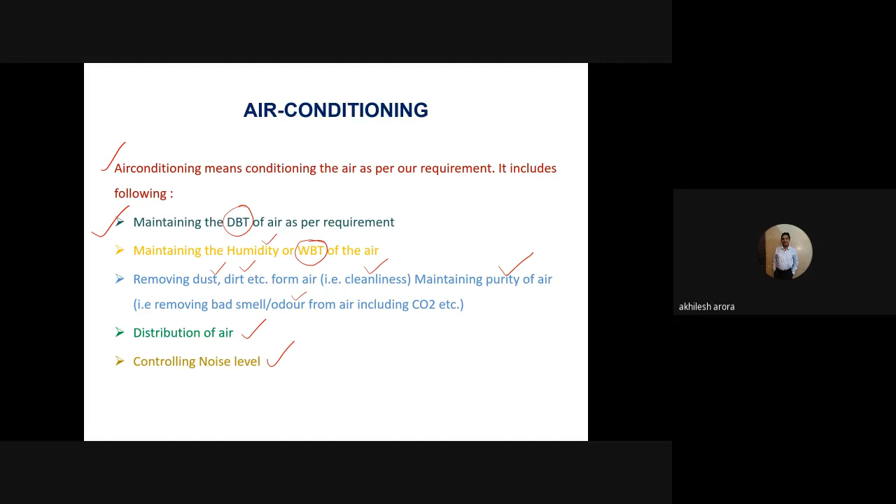Now let us proceed further. When we talk about air conditioning, it is the air which is important in this particular case because the working substance is air in air conditioning. Okay. Now, this air is not just air actually, it is the moist air, and moist air is a mixture of two gases. One of these is the dry air part, which itself is a mixture of a number of gases, and the other is the water vapor, which may exist in a saturated or superheated state.

Okay. Now, it means if I am talking about air, then this air is equal to dry air plus water vapor. And when we write air only, it means we are considering the moist air part actually. So moist air is equal to dry air plus water vapor.

And dry air basically comprises different gases, for example, O2, N2, CO2, and many other gases. But you know that O2 is somewhere around 21% and N2 is somewhere around 78%, whereas the other gases are in traces. Okay. And the remaining part is the water vapor, which I will be writing as small w.v. So this is the composition of the air, dry air part and the water vapor. And the dry air part is the major portion and the water vapor is very, very small.

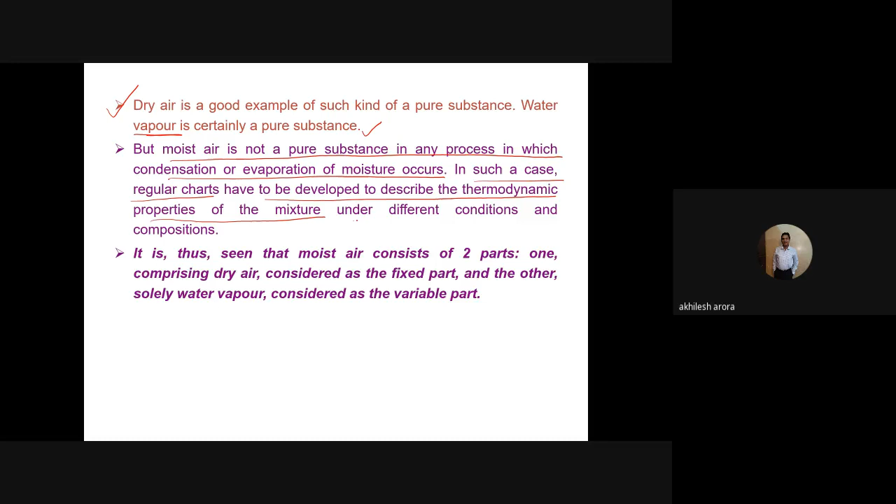Water vapor. Now let us see it here, water vapor. But the moist air is not a pure substance in any process in which condensation or evaporation of the moisture occurs. In such a case, regular charts have to be developed to describe thermodynamic properties of the mixture under different conditions and compositions. Okay, I hope this is clear to you, because when we are talking about the moist air, its composition is varying over the period of time when the condensation or evaporation is taking place. So for this particular case, we will have to develop the regular charts to describe the thermodynamic properties of the mixture.

If we are talking about the dry air part, I can use the equation because I can consider that this dry air is behaving as a perfect gas. Similarly, for the water vapor, I can also assume this as a perfect gas, and I can use the equation PV is equal to MRT for the water vapor. But when they are mixed together, then it's not an ideal gas or a perfect gas. And in that particular case, we have to develop regular charts to describe the thermodynamic properties of the mixture under different conditions and compositions, because the moisture content will vary.

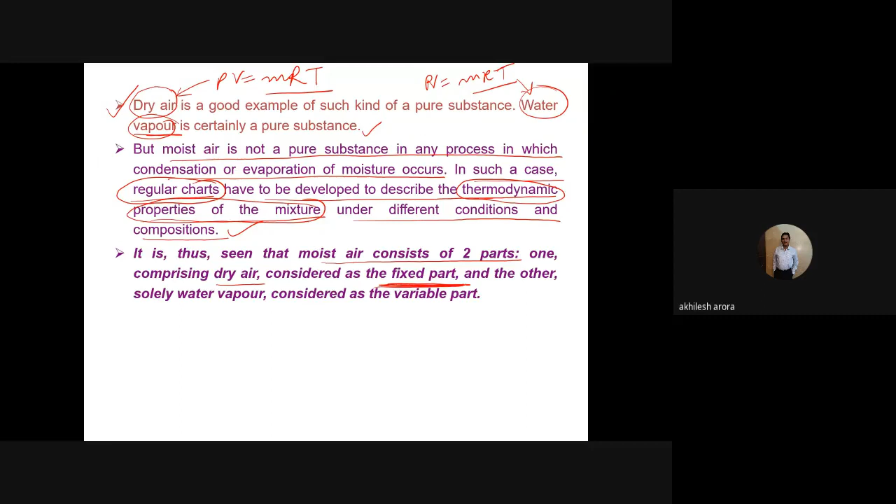It is thus seen that the moist air consists of two parts, one comprising of the dry air considered as the fixed part because it's not going to vary in mass, and the other is solely water vapor considered as a variable part. So I can also write it as M is equal to MA plus MV. MA stands for mass of dry air part, MV is mass of water vapor, and M stands for mass of air. When I say air, it is basically moist air. So I hope this is clear to you.

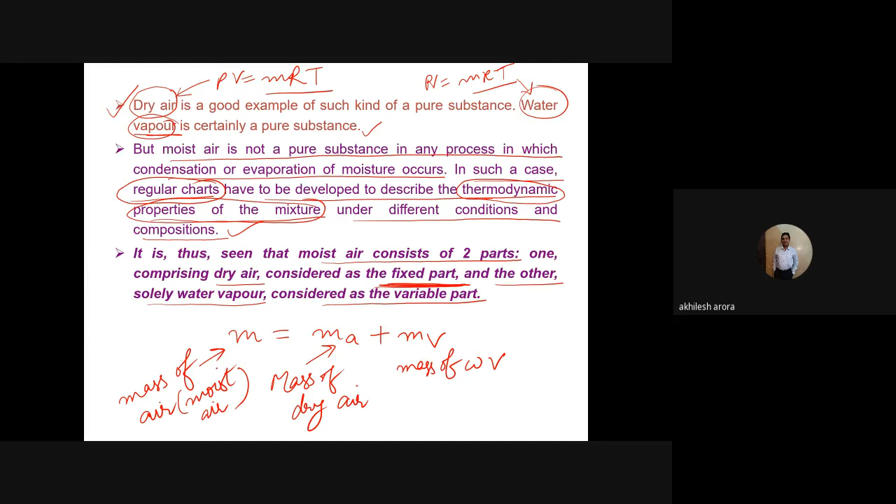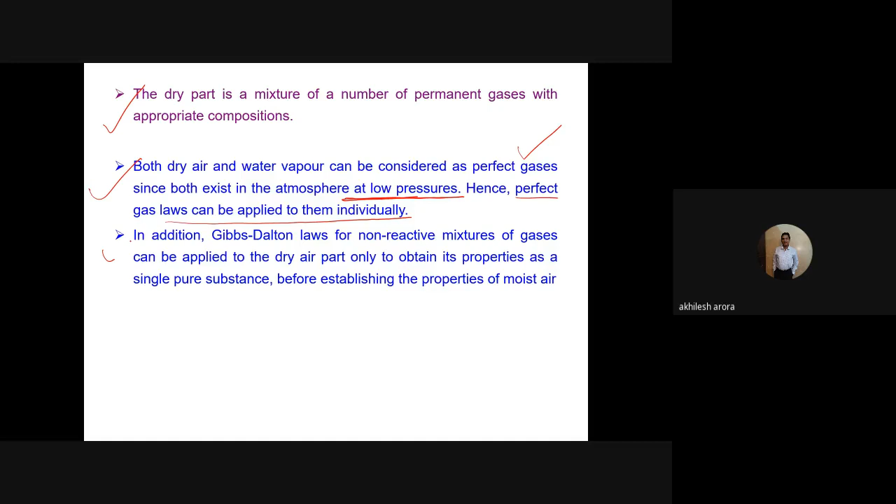The dry air is a mixture of a number of permanent gases with appropriate composition. This I have told you. Both dry air and water vapor can be considered as perfect gases, since both exist in atmosphere at low pressure. Hence perfect gas laws can be applied to them individually. In addition, we can apply Gibbs-Dalton laws for non-reactive mixtures of gases to the dry air part only to obtain its properties as a single pure substance before establishing the properties of the moist air. We will discuss this later on.

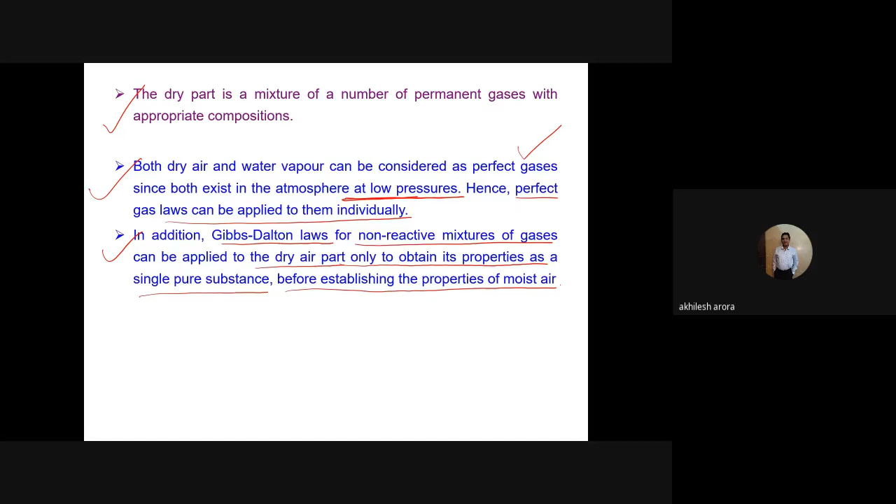So if there are N gases, we have to add the number of moles of all these gases, and to calculate the total mass, we add the masses of different gases M1, M2 and so on, and the total mass M will be equal to sigma Mi, where i stands for a particular gas. All these gases are existing at temperature T. The total pressure is P, and each component or each gas is occupying a volume V.

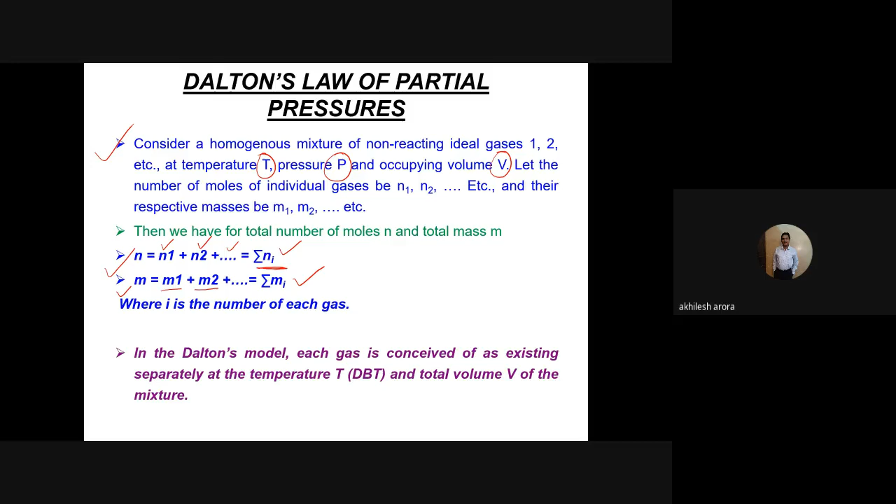So what is shown here? Suppose there are only two gases in a closed container. Now we have a pressure gauge here which measures the pressure as P, and a thermometer measuring the temperature as T. The volume here is V. So we have described the three properties: pressure, temperature, and volume. The volume of this container is V, which is fixed. Both gases 1 and 2 are occupying this volume. The total pressure of both these gases is P, and the temperature of the mixture is T.

Now let us see what is Dalton's law of partial pressure. We take the same container having volume V, with gas 1 only now, and its pressure is measured with the help of this pressure gauge. The temperature is the same as that of the mixture of gases. But now what is happening?

The pressure which is being measured is P1. And what is this P1? This P1 is the partial pressure of the gas 1. Then what we will do? We are taking the second gas separately, occupying the same volume V at the same temperature T, and its pressure is P2. Okay. So when we add both these, we take the same container with the total volume V, and then the pressure which is shown in the pressure gauge at temperature T will be equal to P. So you can see it here.

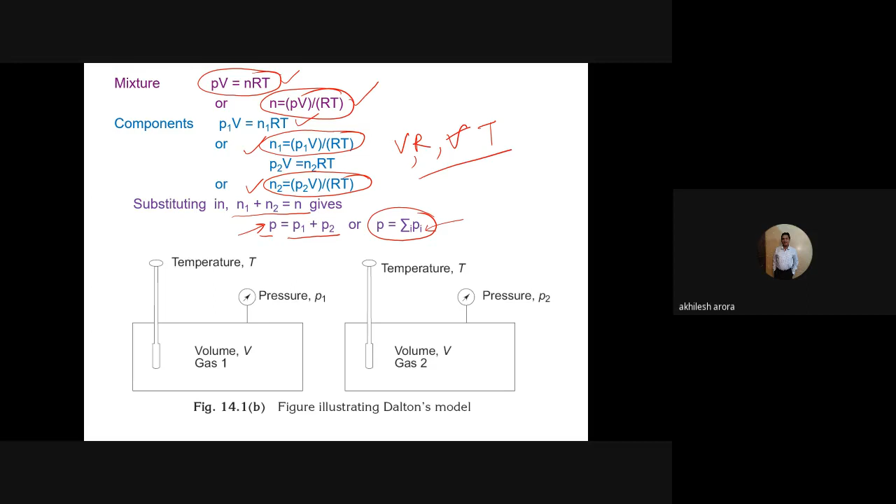So you can see there are certainly some parameters which are common. What are those common parameters? It is volume V, it is R, and it is T. So these parameters will be cancelled out, and we are left with P is equal to P1 plus P2, which means the total pressure P is equal to the sum of the partial pressures of the two gases. If there are more gases, then we can write P is equal to sigma Pi, where i is the number of the gas. Okay, I hope this is clear. So thus for a mixture of ideal gases, the total pressure P is equal to the sum of partial pressures. This is known as Dalton's law of partial pressures.

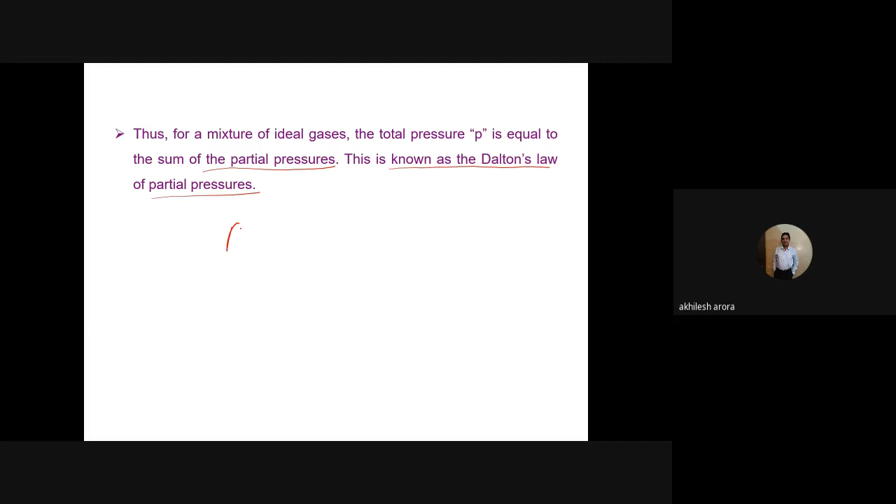Now let us talk about the psychrometric properties. Before I go to the psychrometric properties, I would like to know one important thing from you, and that is what is the state of the moisture in the air. One more thing I would like to tell you here. When I have told you this Dalton's law of partial pressure, I can always write that P total is equal to P of the dry air part plus P of the water vapor. So I can say that P is equal to PA plus PV.

And what is this P? This P is the atmospheric pressure. This PA is the partial pressure of the dry air part, and this PV is the partial pressure of water vapor. Now my question to you is, what could be the partial pressure of the water vapor in the air? What is the value of the partial pressure of water vapor in the air?

Actually, what I have shown here is atmospheric pressure. So it means the partial pressure of the dry air part and the partial pressure of the water vapor together is equal to 760 millimeters of mercury column, which is also equal to 1.01325 bar. So this is the value of the atmospheric pressure. Now my question is, what is the value of the partial pressure of the water vapor?

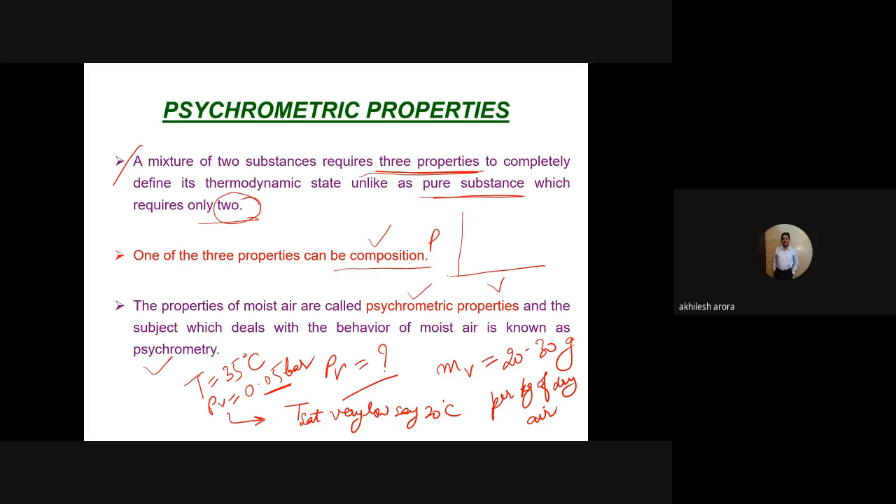But if it is a mixture of two gases, then you need three properties to completely define the thermodynamic state of the mixture. One of the three properties can be composition. The properties of the moist air are known as psychrometric properties, and the subject which deals with the behavior of the moist air is known as psychrometry. That is why the name of the chapter is psychrometric properties of the air. Psychrometry is the branch of science which deals with the properties of the moist air. This I have already told you, so I will not go into this slide.

For defining and calculating the relevant psychrometric properties, we can consider a certain volume V, which is the volume of the moist air, P is the pressure, T is the temperature or the dry bulb temperature, Ma is the mass of the dry air, Mv is the mass of the moist air. We can also call it M. So Mv or M will be one and the same thing. So you can see we have taken a sample here, comprising the dry air part and the water vapor part.

Mv here is not the moist air, it is actually the mass of water vapor, and M is the mass of moist air. So Mv is the mass of the water vapor, specific volume of the water vapor is Vv, and the specific volume of the dry air part is Va. And this shows the total volume V, which is equal to the dry air volume as well as the water vapor volume. M is equal to Ma plus Mv.

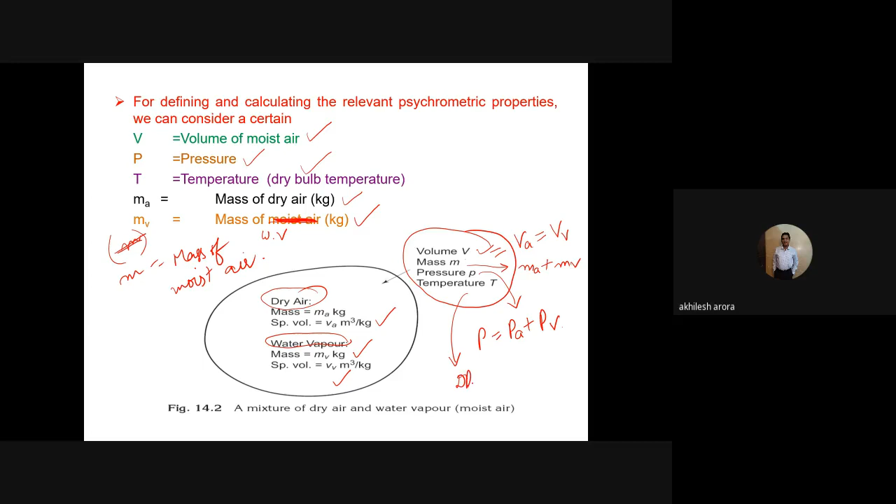And this pressure is the barometric pressure P, which is equal to Pa plus Pv. And temperature T is constant and this is the dry bulb temperature. Now I will go to the definition of the dry bulb temperature. Dry bulb temperature is the temperature recorded by a thermometer whose bulb portion is not affected by direct radiations and moisture.

So suppose we have a thermometer like I am showing here. So this is the bulb portion. Okay. So if this bulb portion is not affected by the moisture and the direct radiations, then whatever is the temperature that is being measured here, let us say this is the temperature T, then this temperature is known as the dry bulb temperature. So basically direct radiation means it is not directly kept in the sunlight actually.

Okay, when it is directly kept into the sunlight, then the temperature will be different. So basically we are keeping this thermometer in the shade actually. So when it is in the shade, the diffuse radiations can come, but direct radiations will not come. So whatever will be the temperature measured by the thermometer, that will be known as the dry bulb temperature. So basically there is no moisture here. There is no moisture.

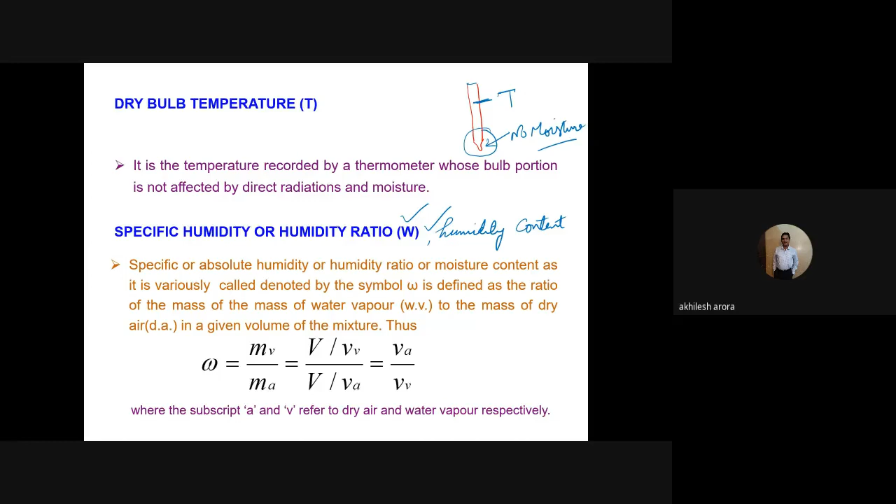The next is the specific humidity or humidity ratio. Specific humidity or humidity ratio, also known as humidity content. Okay, and it is denoted by W. And there is one more name, I am forgetting that. Specific humidity, humidity ratio, humidity content, and another name is absolute humidity.

So basically, these four names, absolute humidity, specific humidity, humidity ratio, and humidity content, they are one and the same thing, and they are denoted here by capital letter W or small letter w. Okay. So specific or absolute humidity or humidity ratio or moisture content. Okay, it's not humidity content, it's the moisture content, as it is variously denoted by the symbol W, is defined as the ratio of mass of water vapor to the mass of dry air in a given volume of the mixture.

So basically what is the definition? It is the mass of the water vapor mv divided by mass of the dry air part. So when we calculate the mass of the water vapor, it is given by total volume of the sample, as I have shown you the sample, total volume of the sample divided by the specific volume of the water vapor, divided by the total volume divided by the specific volume of the air. So it means it is equal to va by vv, which also can be written as rho v by rho a, where rho is the density of the water vapor divided by density of the dry air part.

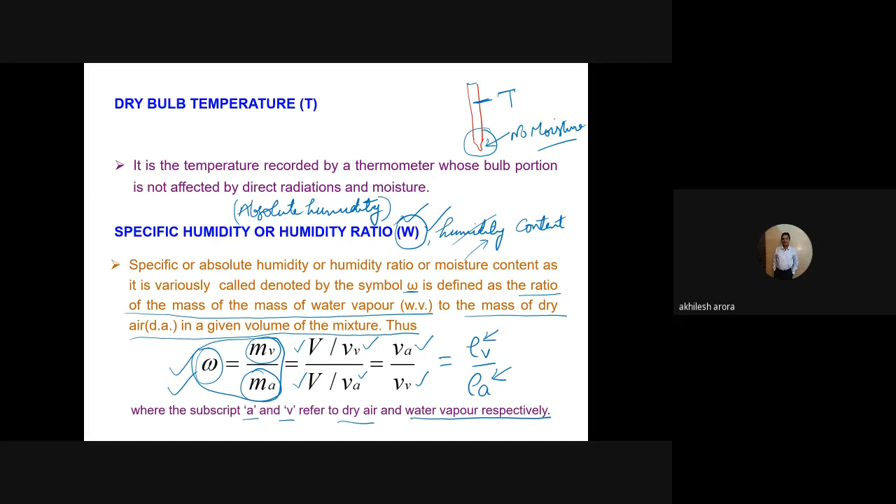So it is written here also that the subscripts a and v refer to the dry air and the water vapor respectively. So you should always remember this particular definition: W is equal to mv by ma. This is the important equation. Now let us give you an example. Suppose I have the air which contains say 2 kg. It is 2 kg of the air, and the water vapor is, let us say, 0.2 kg. Then what is the value of W?

Now W is actually given by mv by ma. So it will be equal to mv divided by, now what is the value of ma? I know that m is equal to ma plus mv. So it means the value of ma will be equal to m minus mv, and it will come out to be 1.8 kg. So here it can be written as m minus mv, and the value will be equal to 0.2 divided by 1.8.

Now what is the unit of W actually? So you will say that it is the ratio of the masses. Yes, it is the ratio of the masses, but we have to give it a unit, and that unit is actually kgs of water vapor divided by kgs of dry air. Okay, dry air I am writing by d.a. So this is the value of the dry air.

Now suppose this air is at a particular state. Okay, dry air as well as the water vapor, they are at a particular state. I told you, when there is no phase change, both will be behaving as a perfect gas, so I can apply the perfect gas laws to it. So I am writing this particular equation for the perfect gas for the air: pa into V is equal to ma into R bar divided by Ma into T.

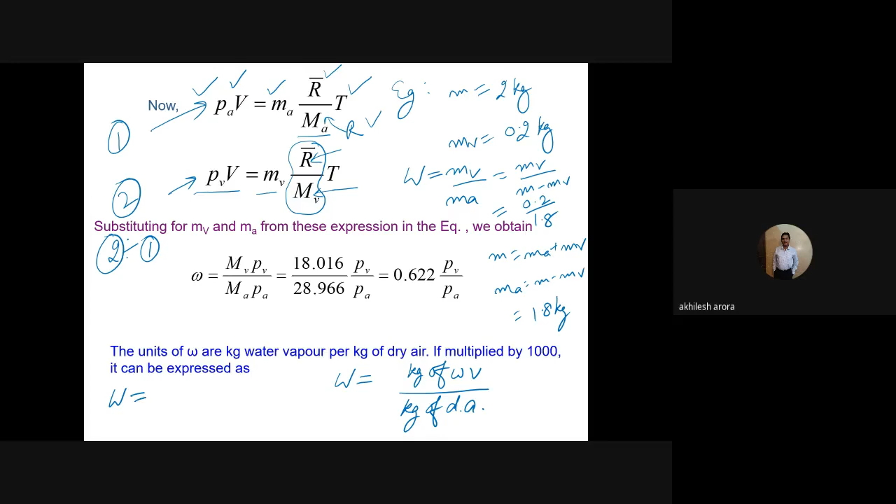So now in the next case, what I am doing is I am dividing these two equations. If I say this is equation number 1, and this is equation number 2, I am dividing equation number 2 by equation number 1. So what will I get? Rather than W, I will write that PV into V divided by PA into V is equal to R bar divided by MV into T divided by R bar divided by MA into T.

So V and V cancels out, R bar by R bar cancels out, temperature and temperature cancels out, and we are left with this term. This is mv by ma, and you know that this mv by ma is the specific humidity. So W will be equal to MV into PV divided by MA into PA, and this is the molecular mass of the water vapor, and this is the molecular mass of the air. So it comes out to be 0.622 into PV divided by PA. So this is the value of the specific humidity.

And as I told you, the units of W are kg of water vapor per kg of dry air. So here you can see it has been multiplied by 1000. When we multiply it by 1000, the value comes out to be 622 PV by PA grams of water vapor per kg of dry air, because the mass of the water vapor is very small. But generally we don't use this particular equation. We will use W is equal to 0.622 PV by PA, kg of water vapor divided by kg of dry air. So that is the unit of the specific humidity.

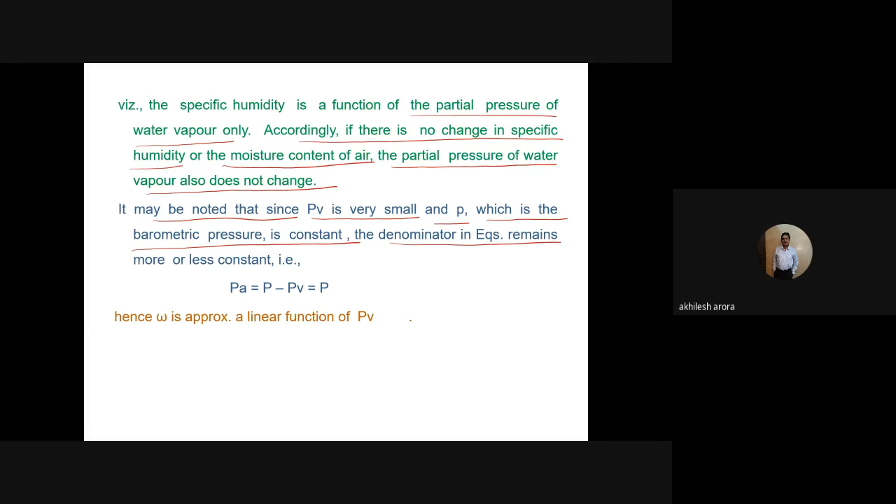Specific humidity is a function of the partial pressure of the water vapor only. Accordingly, if there is no change in the specific humidity or the moisture content of the air, the partial pressure of the water vapor also does not change. It may be noted, since PV is very small and P, the barometric pressure, is constant, the denominator remains more or less constant. That is, PA is equal to P minus PV, which can be approximated as P.

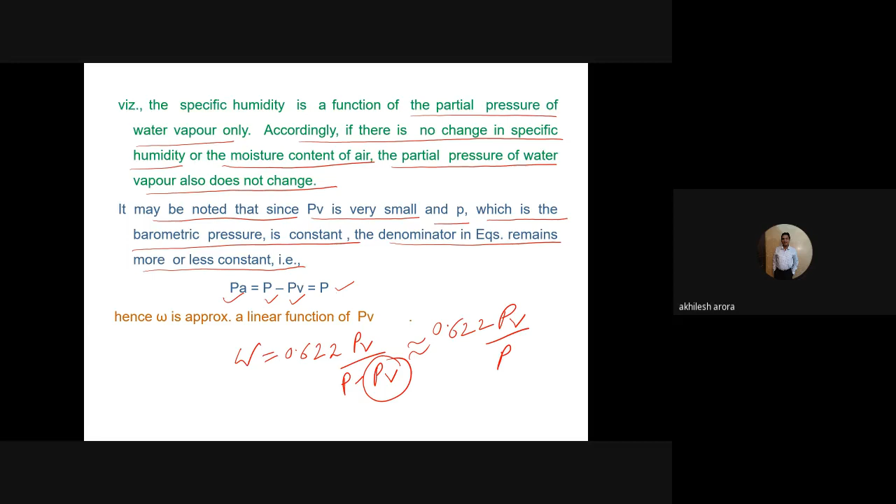So I can always say that W can be written as 0.622 PV divided by P minus PV, and because this value is very small, it is equal to 0.622 PV divided by P. I have neglected the partial pressure of water vapor in the denominator. So W is approximately a linear function of PV. That is what is written here in this particular line.

Now let us focus a little bit on the specific humidity. I said that W is given by mv by ma. So suppose I say that the mass of the dry air part is 1 kg. Then what is the value of mv? From this equation, if I am taking 1 kg of the dry air part, then the mass of the water vapor is equal to W.

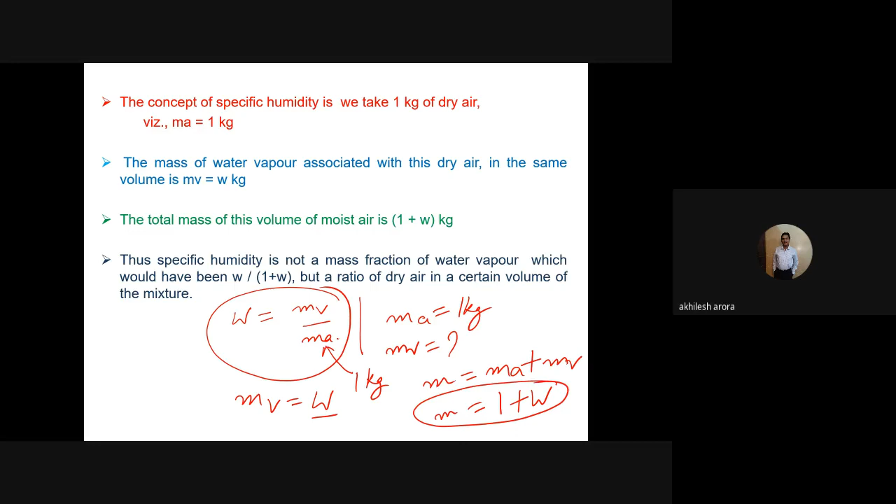So what is the total mass of the air? M will be equal to Ma plus Mv, and this value is equal to 1 plus W. So this is the total mass of the air. Okay. So total mass of this volume of moist air is 1 plus W kg. This is what I have explained you here in this particular

way. So you can see the specific humidity is not a mass fraction of the water vapor, which would have been W upon 1 plus W, but a ratio of dry air in a certain volume of the mixture.

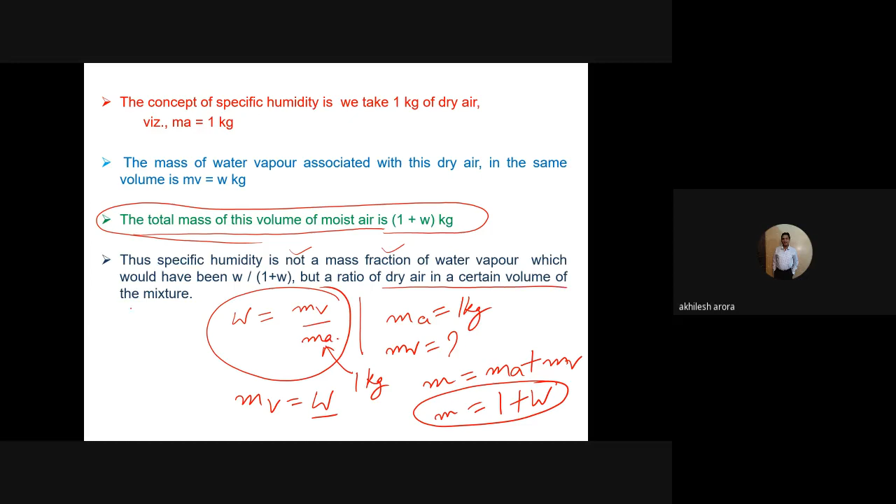Now let us talk about the dew point temperature. So till now we have talked about, number one, the dry bulb temperature, and the second thing we have talked about the specific humidity, and third we are going to discuss about the dew point temperature. This is the third property. Now, as I told you, the air is at a temperature of T, and this is the dry bulb temperature. Okay, so you can see here in the graph, this temperature is T.

This is the TS diagram actually, and this pressure is PV. I can show it. This is the PV, partial pressure of the water vapor, and this is the temperature at saturation. This is the saturation. Now suppose the moisture is at this particular point. So it is in the superheated state, as you can see from the TS diagram. So if I cool this at the constant partial pressure, means I follow this particular line, what will happen?

The moment the air water mixture reaches at this particular point, what will happen? The first drop of the moisture will be condensed out. Okay, first drop of the moisture will be condensed out, and the temperature at which this moisture will condense out is known as the dew point temperature. Okay, so let us read what is written here.

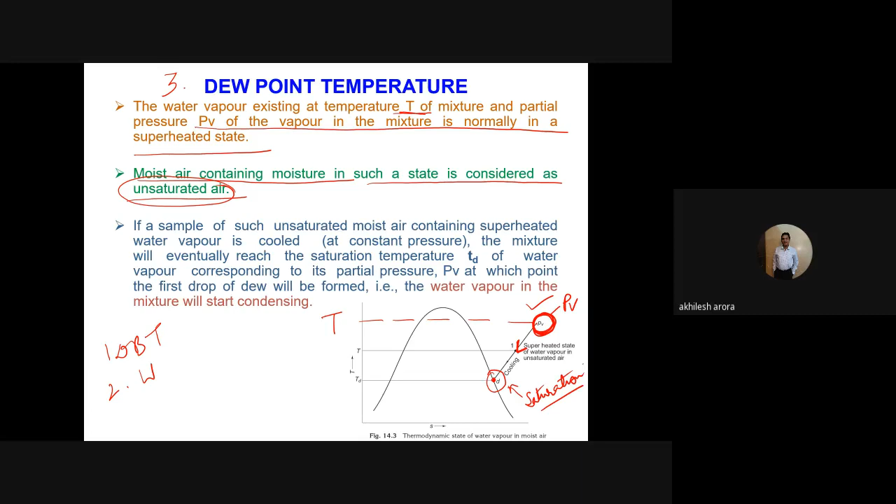So what is the difference between the two? When I say unsaturated air, it means it can hold more amount of the moisture. As you can see here, in a superheated state, I can add more of the moisture so that the air becomes saturated. Means when I will add moisture to the unsaturated air, a condition will come when no more moisture can be added to it.

When no more moisture can be added to the air, then it will become saturated with the moisture actually. So that condition can also exist, but right now we are talking about the unsaturated air. So unsaturated air has the holding capacity, means it can have more amount of the moisture in it. Okay, but in this particular case, for the time being, you consider it as unsaturated air.

Now, if a sample of such unsaturated moist air containing superheated water vapor is cooled at constant pressure, the mixture will eventually reach the saturation temperature TD of the water vapor corresponding to its partial pressure PV, at which the first drop of the dew will be formed. That is, the water vapor in the mixture will start condensing. So that is what I told you.

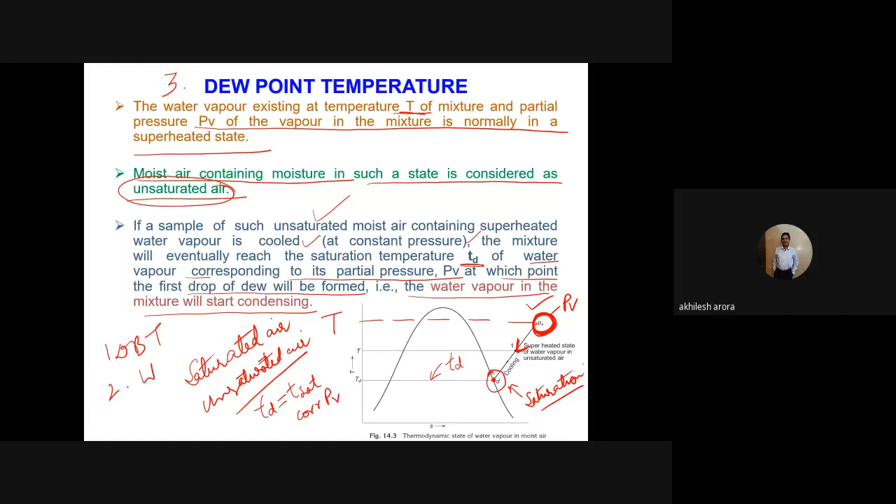So TD is the dew point temperature, and it is actually the saturation temperature corresponding to PV, partial pressure of the water vapor. So whenever you have to calculate the dew point temperature, you can see it from the steam table. If you know the partial pressure of the water vapor, you can go to the steam table, see the corresponding saturation temperature, and it will tell you the dew point temperature.

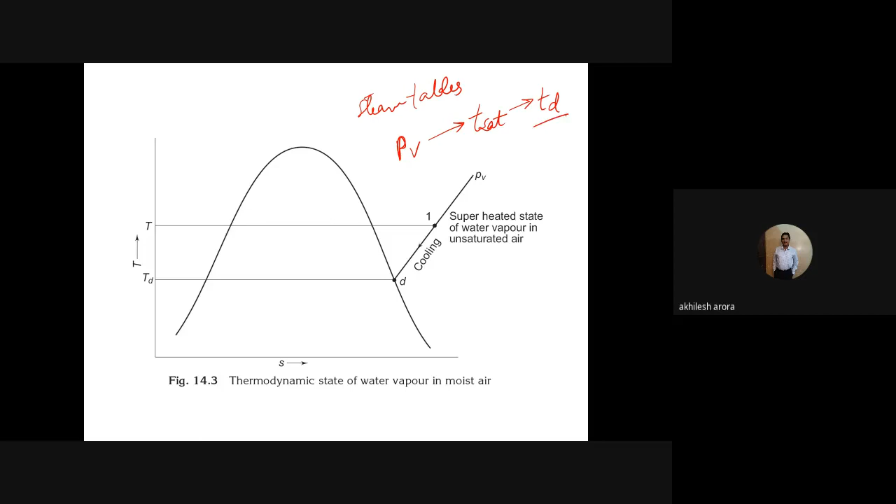So once again here, I am telling you that if you go to the steam tables, you have to choose a particular partial pressure of the water vapor, and whatever is the saturation temperature seen from the steam tables, that saturation temperature is known as the dew point temperature. Okay, this temperature TD is called the dew point temperature, also known as DPT.

The temperature to which the moist air must be cooled at constant pressure before condensation of the moisture takes place is known as dew point temperature. So this is the condition actually. The temperature to which moist air must be cooled at constant pressure. But which is this constant pressure? This constant pressure is actually PV. This is partial pressure of the water vapor. So constant pressure before condensation of the moisture takes place.

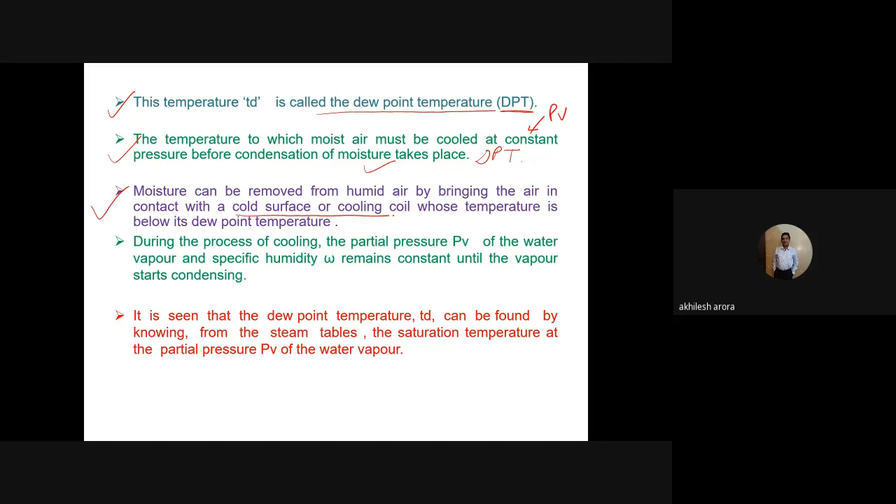So condensation should not occur actually. This is the condition. But it is about to start. That temperature is actually the dew point temperature. Moisture can be removed from humid air by bringing the air in contact with a cold surface or a cooling coil whose temperature is below its dew point temperature.

So it means, suppose we have a coil here and the temperature of this coil is, let us say, 7 degrees Celsius, whereas the dew point temperature of the air, let us say, is 20 degrees Celsius. I'm just taking an example. Suppose air is passed over this coil, the air is at, let us say, 35 degrees Celsius. When it will be passing through this coil, in which there is some refrigerant flowing at 7 degrees Celsius, what will happen?

The moment the air reaches 20 degrees Celsius, the condensation will start. The moment the temperature will be 19.99, the condensation will start. So basically 20 degrees Celsius is the dew point temperature. During the process of cooling, the partial pressure PV of the water vapor and specific humidity ω remain constant until the vapor starts condensing.

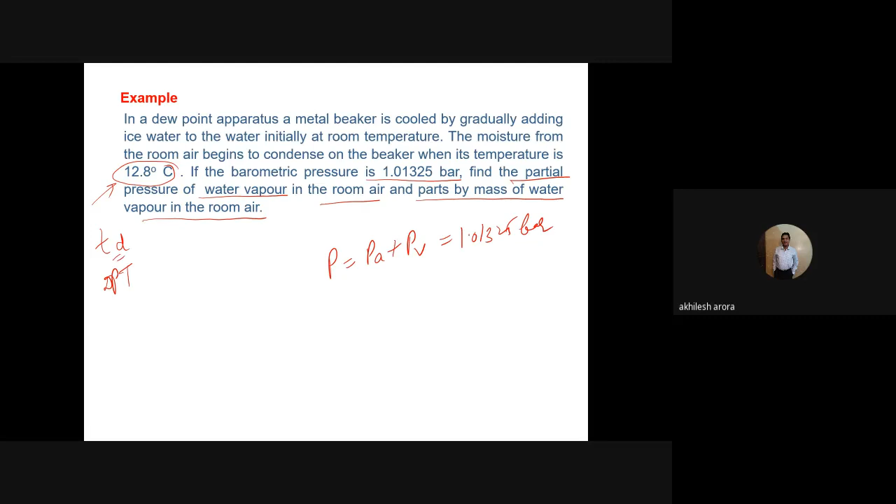Find the partial pressure of the water vapor in the room air and parts by mass of water vapor in the room air. So I think the question is clear to you. We are given two things, TD and the total pressure. So we can go to the steam tables corresponding to 12.8 degrees Celsius, because it is the value of TD, the dew point temperature. I can read the value of PV, which is coming out to be 1.479 kilonewton per meter square, so basically in kilopascals.

So what is the partial pressure of the dry air part? As I told you, P is equal to PA plus PV. So I want to know the value of PA. This value is in pascals, this also is in pascals. So this is 99846 pascals. This is the partial pressure of the dry air part.

Now we have to calculate the specific humidity. Specific humidity is given by the formula mv by ma and also by 0.622 pv by pa. All the values are known to us, so it is coming out to be 0.009214 kg of water vapor per kg of dry air. So how much is the amount of water vapor? You can see it is in kgs. If you multiply by 1000, it comes out to be 9.214 grams of water vapor per kg of dry air.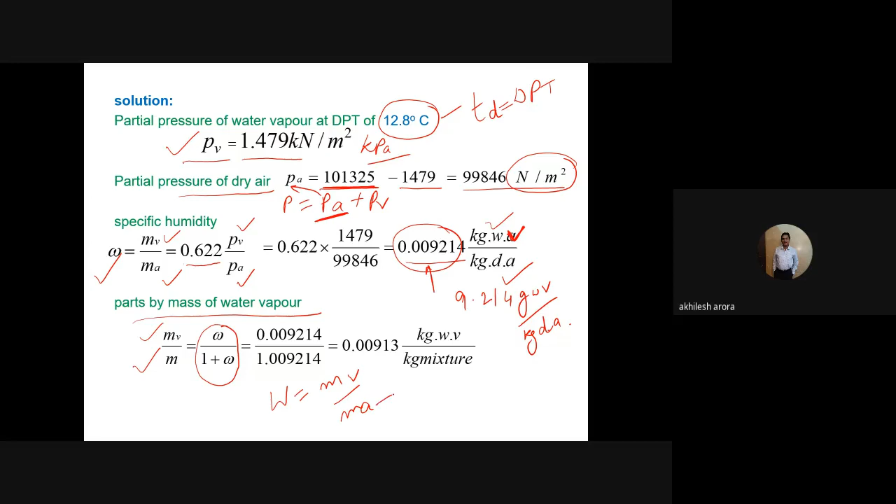So ma can be written as m minus mv. So from this equation, you can calculate the value of mv by m, and this comes out to be W over 1 plus W. So you will get this particular value, this much kgs of water vapor per kg of mixture.

Okay, so I will take one more definition. Degree of saturation. Now see, degree of saturation is also very easy. This is the fourth definition actually. See, we were talking about this is the unsaturated air condition. Unsaturated air. This is superheated water vapor in unsaturated air. Now, suppose at the same temperature, this is dry bulb temperature.

At the same temperature, in the given mixture, we are adding the moisture. See, this was the given mixture. Here, the mass of the water vapor is mv, mass of the dry air is ma, total volume is v, the temperature is t, and the total pressure is p. Now I am saying that this is unsaturated air, it can hold more of the moisture. So we are keeping the dry bulb temperature constant, and we are adding more amount of the moisture to it.

When we add more amount of the moisture to the air, what will happen to the partial pressure of the water vapor? The partial pressure of the water vapor will start increasing, and it reaches this particular point, which is actually equal to ps. So partial pressure of the water vapor changes to ps. Ps means the partial pressure of the water vapor corresponding to dry bulb temperature.

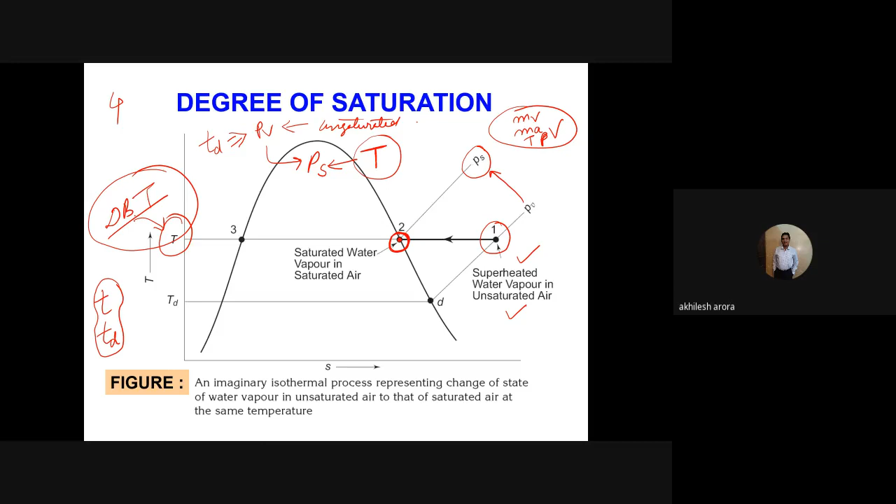One more thing I have not told you: when we talk about the dry bulb temperature, we represent it by small t. When we talk about the dew point temperature, we represent it by small TD. So these two nomenclatures are used for dry bulb temperature and dew point temperature. Or if it is written as capital T also, then also it is dry bulb temperature. So let us see. Yes, this is what I wanted to show you.

Now, when the air has got saturated, PV has actually increased to PS. So what is the value of WS? WS is the specific humidity at saturation. It is equal to 0.622 into PS divided by P minus PS, because PS is the partial pressure of the water vapor at saturation condition, and the denominator is now P minus PS. So here we have calculated WS, the specific humidity for the saturated air.

And what is degree of saturation? Degree of saturation is denoted by mu, and mu is the ratio of the specific humidity of the unsaturated air divided by specific humidity of the saturated air. So we get this expression: PV by PS, 1 minus PS over P divided by 1 minus PV over P. This is the expression for the degree of saturation, and it is the measure of the capacity of the air to absorb moisture.